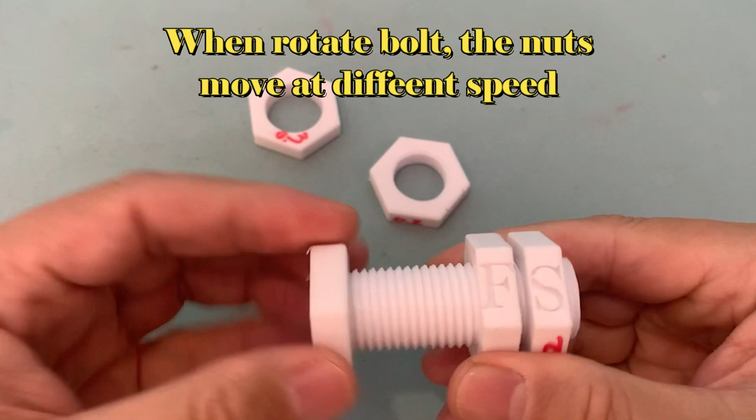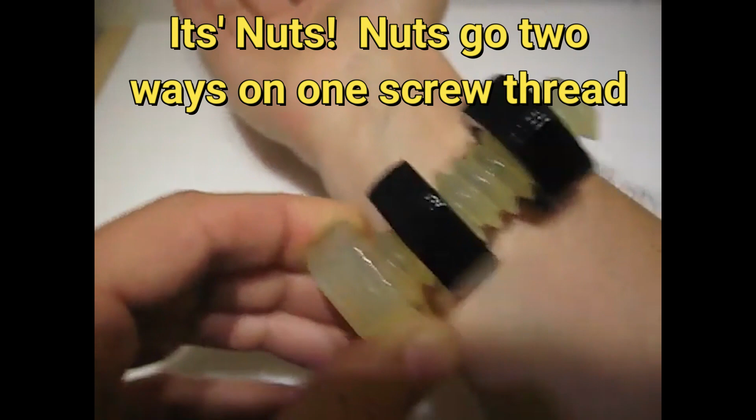I was inspired by this video. After mounting the nuts to the bolt, turn the bolt in one direction, the nuts will go in a different direction. If you take a close look, you can find some small ridges at the top of the thread, so I know it is two threads bound together in fact.

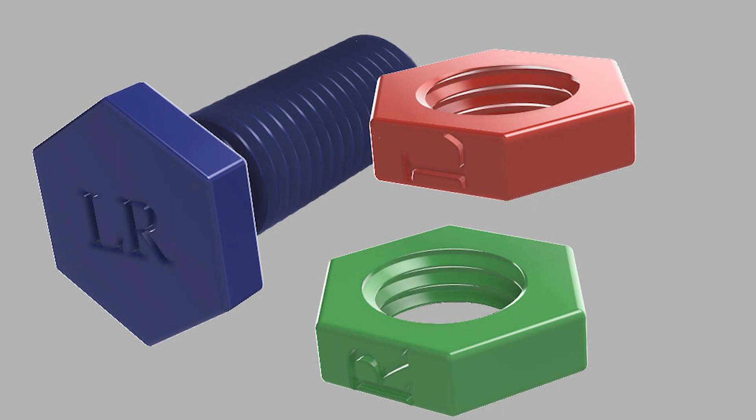I decided to make a similar bolt and nuts using Fusion 360 and 3D printing. It is a beginner's level technique if you know the methods and the tricks. Stick around. I will tell you how to do it.

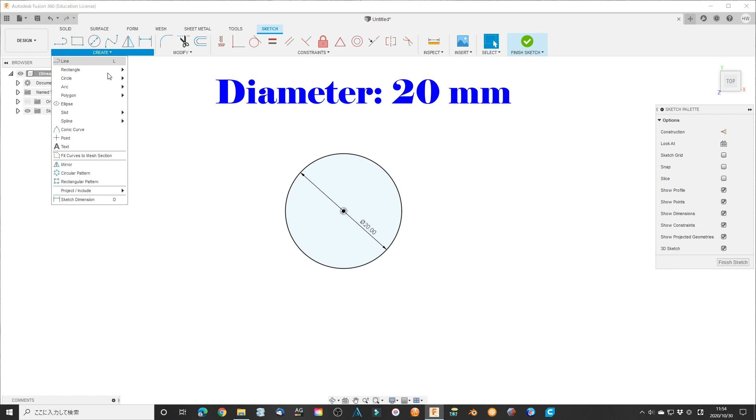Let's start. Number 1. Double threaded bolt in a different direction. First, create a very simple sketch. Draw a circle whose diameter is 20 mm for the test, and a hexagon whose parallel distance is 30 mm. The hexagon is larger for making the bolt head. Close the sketch. Extrude the circle to make a cylinder whose height is 50 mm.

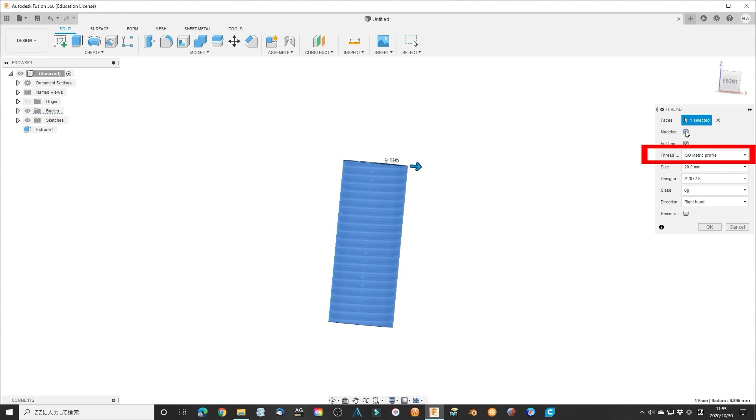Use the thread function to make a bolt. Make sure to check this box, otherwise it will not make a real bolt. Use the ISO metric profile format. Select the size 20 mm, designation M20 x 2.5. Check here, make it a right hand or clockwise direction. Click OK to finish. Now a clockwise bolt is finished.

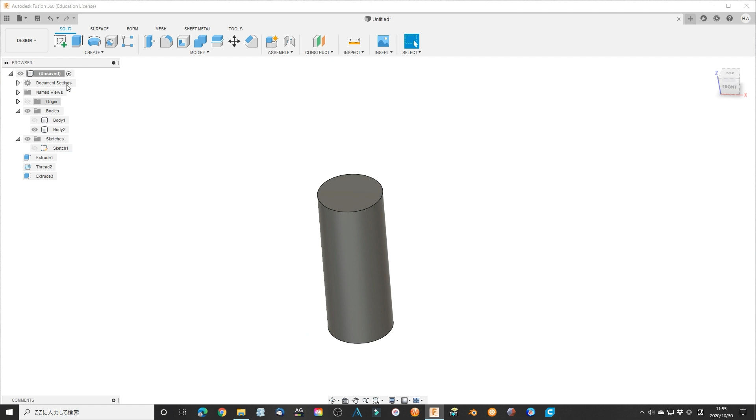Make another bolt in the counter-clockwise direction, using a similar procedure and the same parameters. Just change the direction to the left hand. Now we have two bolts in a clockwise and counter-clockwise direction at the same place.

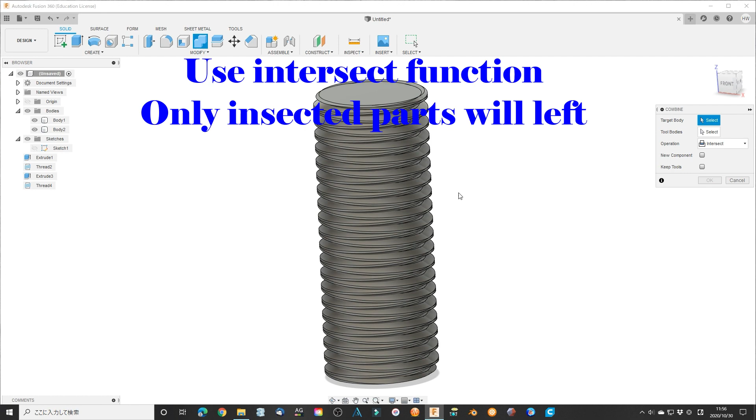Use the combine function and select intersect. This means only the intersected parts of both selected bodies are left. In other words, the final item can be used as clockwise and counterclockwise together. Now, the most difficult part has been finished.

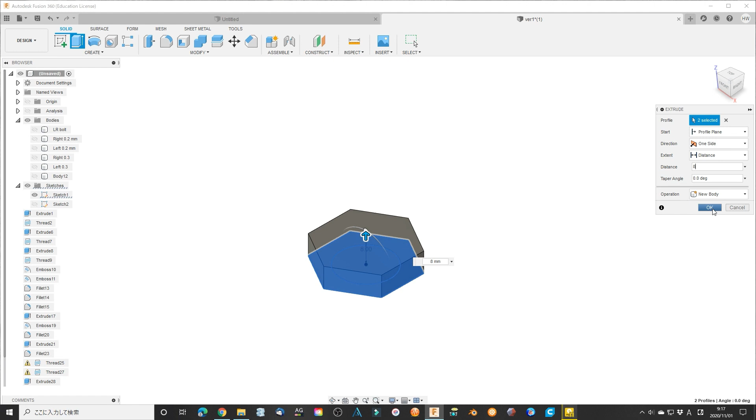Adding the head to the bolt is an easy task. Extrude the hexagon sketch to 8 mm as the head. If you accidentally move the bolt or head, you should align them together using the move tool. Click the point-to-point icon, then click the origin point.

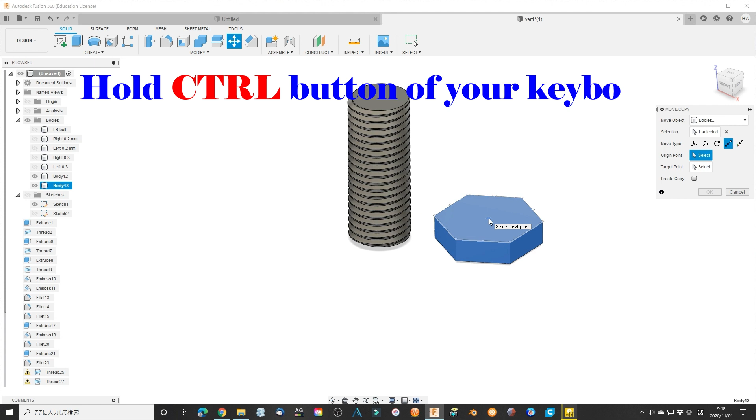The selected part will show the snap points, like the center of the face, the middle point of the line, etc. Hold the Control button on your keyboard and click the selected point. Then select the target point and do the same work. Select the center to align and combine the head to the bolt. It's done.

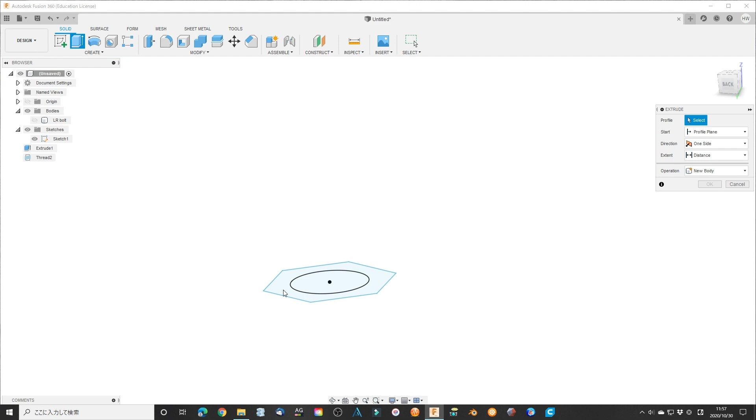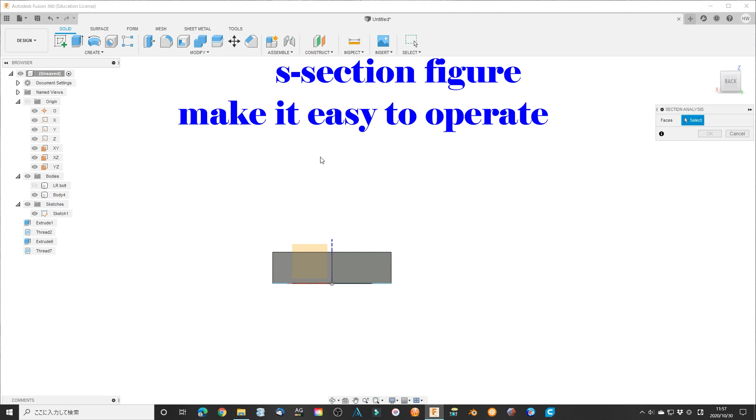Then we make two screws whose directions are clockwise and counterclockwise. Extrude the hexagon part to 8 mm height. Use the thread function and check the right hand and the left hand one at a time. After making the screws, use the section analysis function to make a cross-section of the screw. Select both the top and the bottom side of the thread. Use the press-pull function to make a clearance for the screw.

According to my former video, I know my 3D printer clearance is about 0.3 mm. I select 0.3 mm as a test.

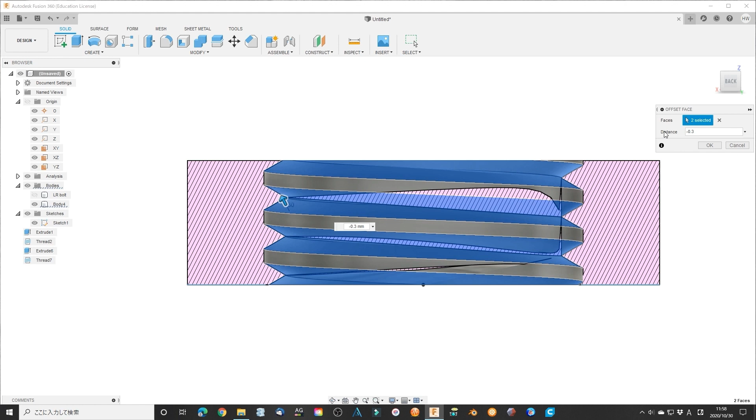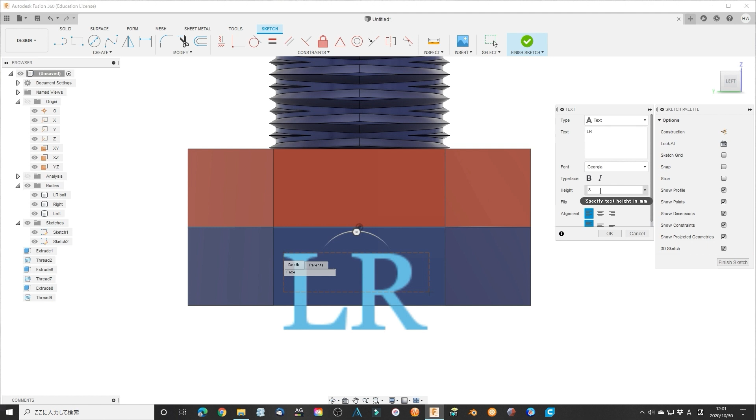Now we start adding some text to the bolt and the nuts using the Emboss function. Create a sketch and select the face where you want to add the text. Then draw an area where you want to add the text. Add the text and adjust the font, size, etc. You can manipulate the text as normal items, such as move, scale or rotate it.

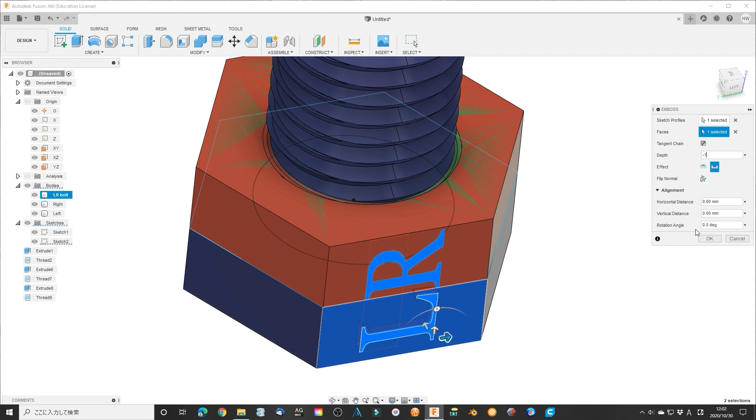Move the text to your destination place. Then finish the sketch. Select the Emboss function. Select the sketch profile, which is the text letters this time. Select the face where you want to put the letters. Adjust the depth and the effect; I select 1 mm and Emboss this time. Click OK to finish.

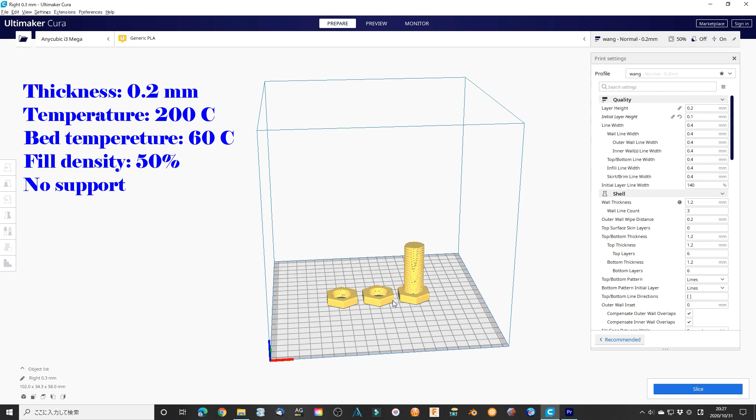Now, export the model using STL format. Print them without a support layer. Now, check if it works or not.

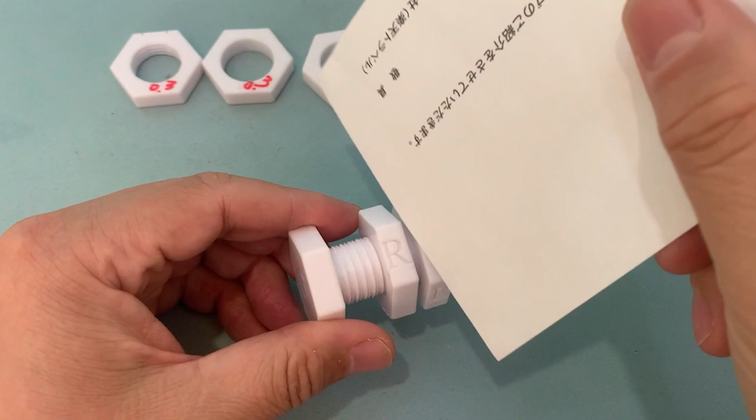It works very well. It can be used as a normal M20 bolt in both directions.

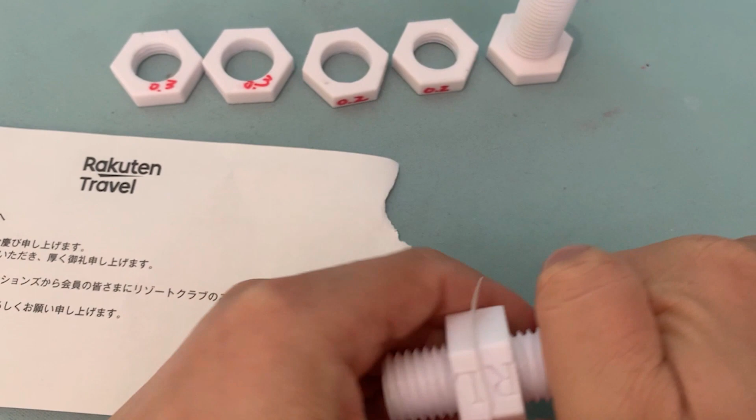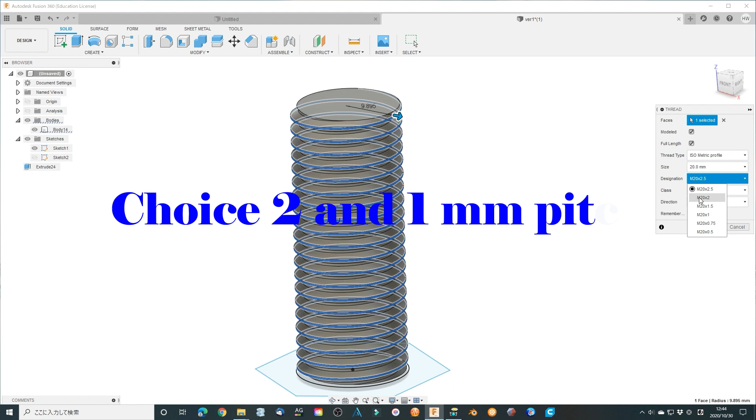Number 2. Double-threaded bolt with different speed. Using the same concept, we can combine different types of thread together. This time, I combine 2 different pitches. I use the same bolt diameter of 20 mm. Choose the pitch 2 mm and 1 mm respectively. Make 2 bolts with these pitches.

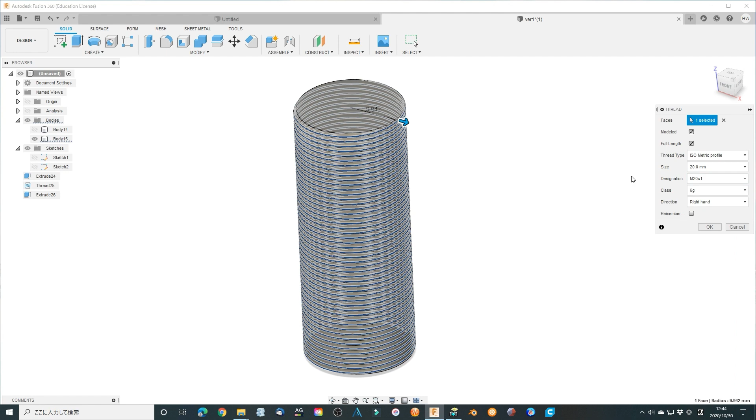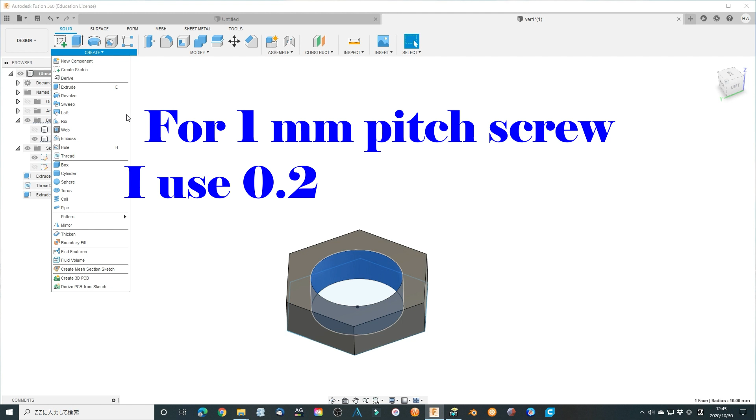Combine them together using the intersect function. Now the double pitch magic bolt has been finished. The remaining screws are made in 2 pitches as well. Remember, the pitches are 2 and 1 mm. This is different from the 2.5 mm of the double-threaded bolt in different directions. Print them.